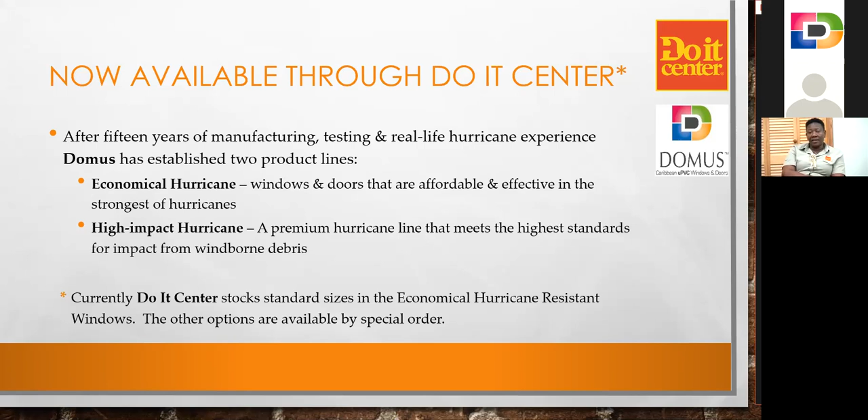Today we will have with us Terrence Ott, who is the CEO of Domus, and Do It Center recently signed on with Domus to present to you the Doors and Windows line. It's the line of hurricane-rated windows, which we already have in stock. And today we'll be sharing with you the features and benefits of having these windows. At Do It Center, we continuously pride ourselves on presenting value added to our customers. And we do believe that introducing this line of windows to our portfolio will add value to our contractors and

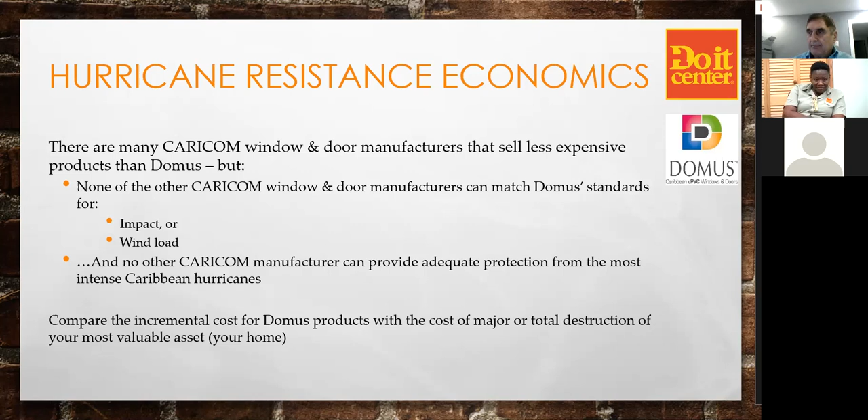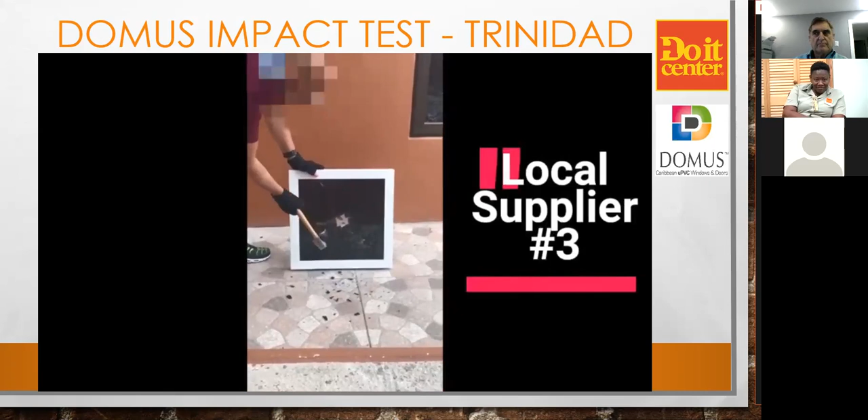Gone right through. Yeah, that makes sense. All right, that's it. No. That is not having glass. Something wrong with it. Okay. This is for you. This is your glass. We're going to test it. How you feeling? You feeling good? We will find out. The thing break right through. God. Look at that. The thing going right through, man. Stop. Laminate glass. We're going to try to hit this and see what happens. But it's going to break. It's gone straight through, look, it's gone through already. 3 hits and it's gone through. This is no good, man. That's gone through. It mash up. That's the end of that, it mash up.

This is your glass. Test your glass. How you feel? It must take 10 shots of this hammer to pass. Nigel, you ready? Let's go. 1, 2, 3. 4, 5, 6, 7, 8, 9, 10. Nigel, you pass.

So I guess that's a demonstration of strength, but we also did a demonstration right in Dominica with even bigger hammers than that one. So this was a video of something we did about a year ago in Dominica in one of the presentations we made there.

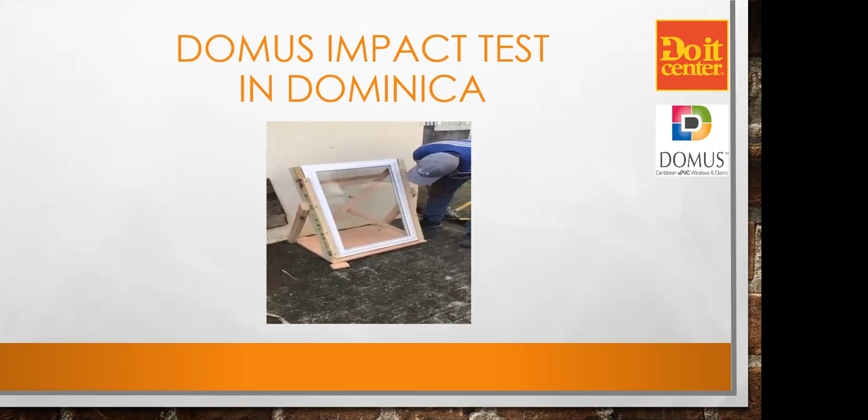Okay, let's go. Hit it now? Yeah. You have to tell me to hit it. Yeah, hit it. What? Can't do any better than that? Yes, I can do better than that. Hit it. Use the same hammer or the other one? Same hammer. Hit it. Okay, hit it again. Okay, whoops. Okay, well, let's try a bigger hammer. Here, is this a bigger one? Okay, so have a go with that one then. Hit it hard. Okay. Okay, now we'll try the big one now.

No, hit it. Okay, hit it. Little one more up here. Maybe one more. Okay, well, I think it should work. Yeah, so that's always fun. And we've tried 10-pound sledgehammers with big beefy guys, and it does the same thing.

So why do you need strong impact glass? Well, there are 2 reasons that windows and doors fail in hurricanes. First of all, you've got airborne debris, stuff flying around. It breaks the glass in 1 or more windows. If you have rubber gaskets, then also they can pop out.

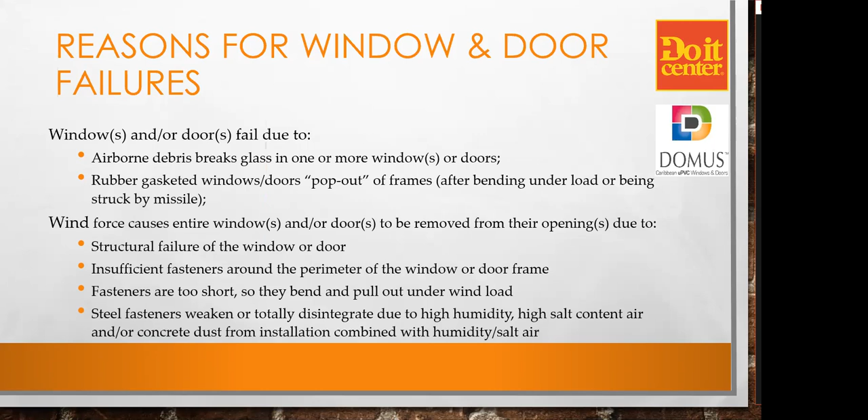Or as in the case of one of the properties, a resort property in Dominica, they used steel fasteners, which were drilled into the concrete openings. Then concrete dust mixed with moisture between the 2 sides of the window totally ate the screws, so that all that was left was the head of the screw. So when a hurricane comes along, it pops out very, very quickly.

So in strong hurricanes, the majority of hurricane shutters fail. Hurricane shutters are typically only rated to 140 miles an hour, whereas with Maria, it was 165 miles an hour. And if you looked at Irma, which could well happen again, the stress on the hurricane shutters is 70% higher than what they're rated to take. Now, we found this not so much in Dominica, but in St. Martin, where people use hurricane shutters all over the place.

We had done a project with our high impact, highly rated hurricane resistant units in a building. And the owner decided he was going to protect the glass. So he put hurricane shutters on about half of the building. He ran out of time and money. And then when Irma hit, he could do nothing. We came back the next day after the hurricane, and sure enough, the windows that had no hurricane shutters were cracked. More than half of them were cracked, but there were no failures.

Then on the windows that had the hurricane shutters, the shutters were gone, and the glass was gone too. The hurricane shutter actually acted as a battering ram and smashed out the glass on every single one of those windows. The hurricane shutters blew away, and the building failed due to hurricane shutters. So the wind load can deflect the shutters sufficiently to pull them out of the rails, but if they don't, they can still act as a battering ram.

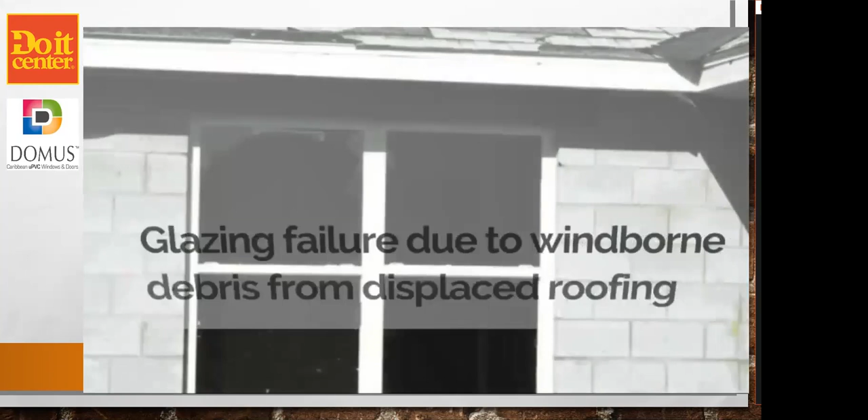So this picture shows a large window that failed. And what happens then is the wind pressure comes in, pressurizes the building, and then lifts the roof off. Now, on a 1,000 square foot roof, if you lose a window or door, you could have up to 30 tons of lift on the roof. And what most people don't realize is that the leading cause of roof failure is that a single window or door has failed.

I've heard the old wives' tale of running around to the other side of the building. If you lose a window on one side, open one up on the other and let the pressure out. Well, that's fine if everything isn't flying around and you can actually get there in time. But typically that wind force can build up in 30 seconds or a little more and take the roof off. So if you lose a window or door, you are going to lose the roof, basically, regardless of how well you fasten it. With that amount of pressure on the roof, it's going to go.

So keep in mind, we need windows and doors that will stand up to those two things. Impact, which could smash out the glass, and we've seen what happens when you've got very weak glass in the previous videos. And the other thing is wind load, which can cause the failure itself.

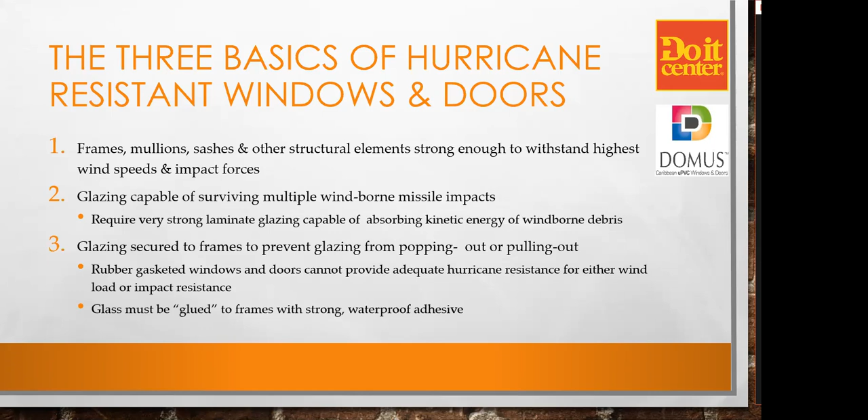So if you have laminate glass and it gets hit, then it no longer has much structural strength. It then relies on its tension, on the elasticity of the laminate. But if the whole glass pops out, then it's not going to do its job. So those are the three basics. And I guess a fourth as well is that it's got to be properly installed, particularly to stand up to wind load.

First of all, you must make sure that you have enough fasteners all around the perimeter of the unit at sufficient intervals to transfer the wind load from the window onto the frame. Now we require no more than 4 inches from each corner and no more than 16 inches between the various screws that are around the perimeter. And those fasteners need to be able to retain the strength for the life of ownership.

I mentioned before the problem of using regular steel screws. Within 2 to 5 years, they can totally be eroded to the point where the window is just sitting in there with whatever caulking strength is left. So we've determined that you require high-grade stainless steel that is going to be impervious to salt air and humidity and so on. And 100 years from now, it will be just as strong as it is today.

The other thing is the fasteners need to be sufficiently long so they don't pull out under wind load or impact. We use 3-inch long screws. And we want to have only a 1/4-inch hole drilled into the masonry. And we want at least 1 inch of those screws in the hole that you've drilled. So when you get pressure on the side, it's going to bridge against the side of the opening. If you use a short screw, they will bend and pull right out.

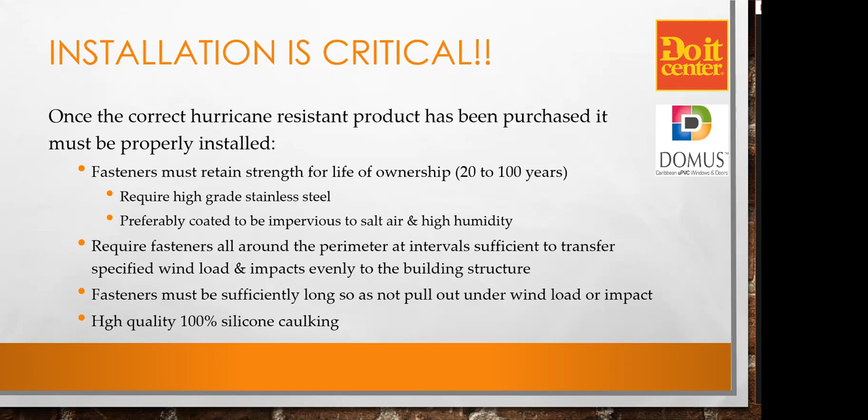So we have the only wind load testing facility in CARICOM. And the reason we can talk about the ability to stand up to wind load is we actually test the units. I have not seen another product manufactured in CARICOM that has been tested. And if I was to take it and put it into our test lab, I have no doubt that 99% of them would fail.

So what we do to test it, we put a test unit against the test wall, and then we apply suction on one side to create a differential pressure. And from there, we can simulate up to 250 mile/hour winds. And keep in mind that the strongest ever hurricanes were Dorian and Allen, and they were 190 miles an hour. So we can simulate even the worst of hurricanes and then go beyond that.

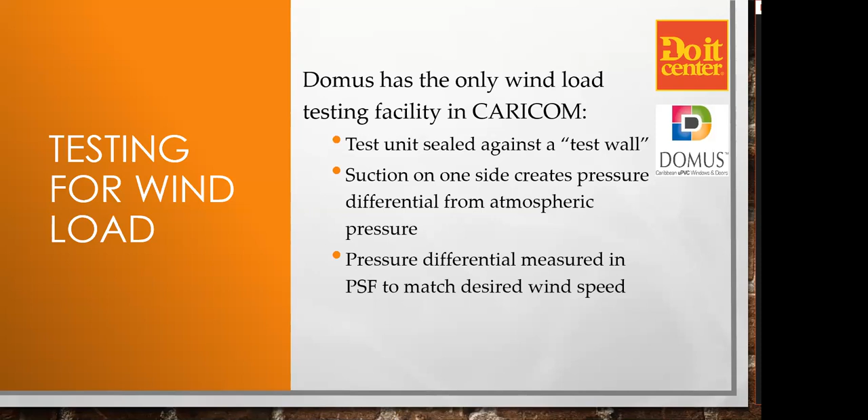Now, in terms of quantifying hurricane resistance, we can look at impact. You remember that windborne debris can knock out the windows as well as wind load. If we're looking at impact standards, we have 2 different products. One is the economical hurricane product, which has to stand up to 3 blows of an ASTM-E 1996 missile C, which is a 4-foot-long 2x4 fired from a cannon at 40 feet per second.

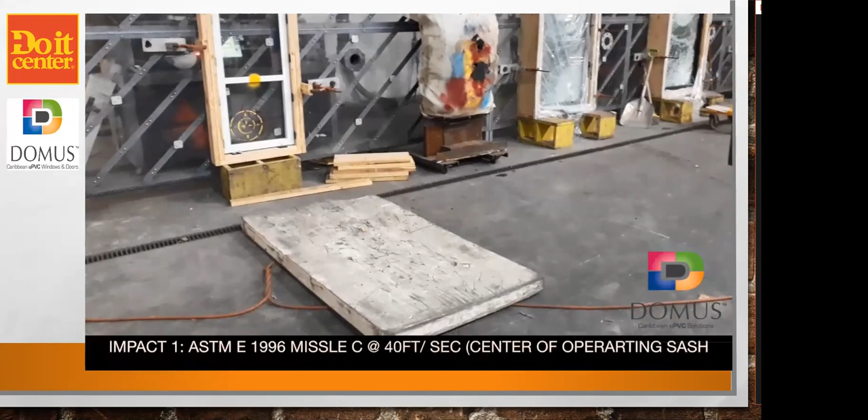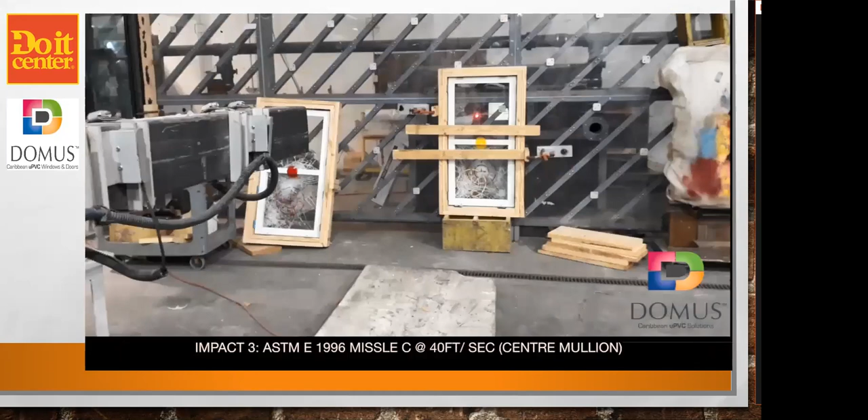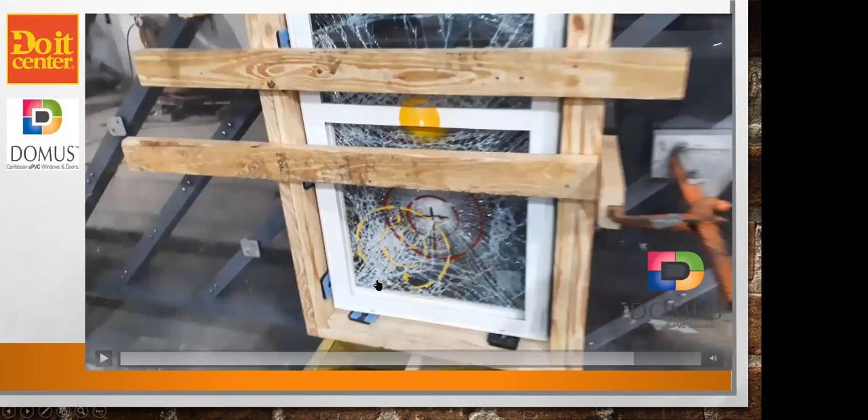Now you can see this window is pretty banged up, but in fact, there is no damage done to the window other than the glass. So if you do happen to take a missile strike in a hurricane, you can simply replace the glass after. But in the meantime, the wind and the debris stays on the outside, rather than letting it in and pressurizing the house and blowing off the roof, as happened to the vast majority of properties that I saw in Dominica after Maria.

Now there's a higher impact standard that we have. This one is the same as Miami-Dade. What we found from Hurricane Irma in St. Martin, which was even stronger than Maria, was that in most cases, we had both the high impact and the economical hurricane products installed. And we found very little difference between the two products in terms of missile capability.

So this one, if you do want the ultimate, which is what you saw with the sledgehammer, has to withstand 3 blows of an ASTM-E 1996 missile D, which is an 8-foot-long 2x4, fired at a higher speed. Now, this is the same as the Miami-Dade standard. And Miami-Dade, I think, set a standard which is very expensive. That laminate is the most expensive part of the window. And so if you have to go to this level, it can increase the cost quite dramatically.

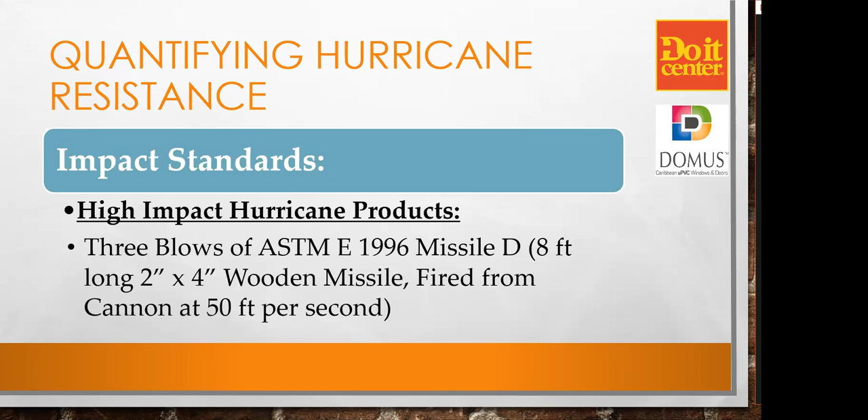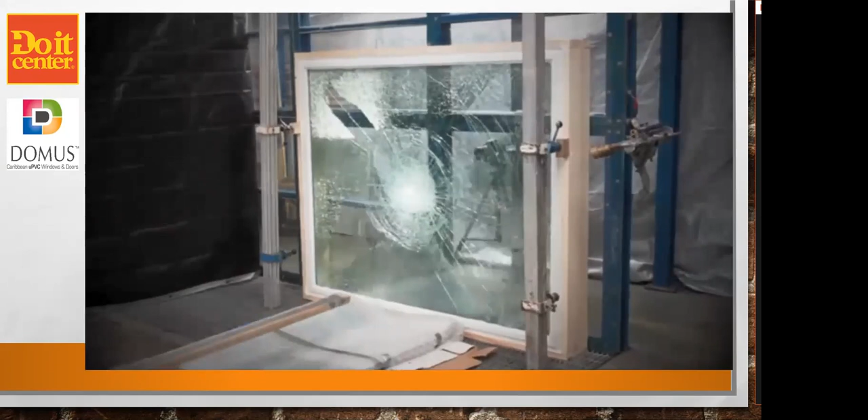Now in this one, you can see how the laminate absorbs the impact. And it is by stretching. The laminate needs to be strong enough to resist the missile going through it. And second, as it stretches, it needs to be capable of absorbing energy. And what's interesting is the bigger the window, the more impact it will take, because the laminate has longer to stretch, which is counterintuitive.

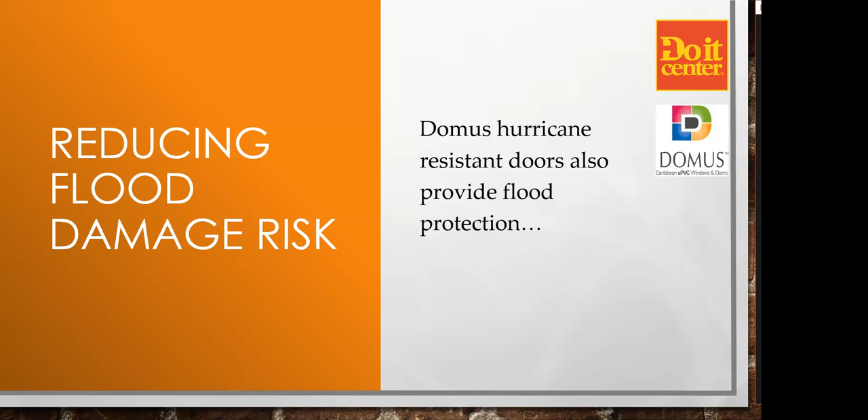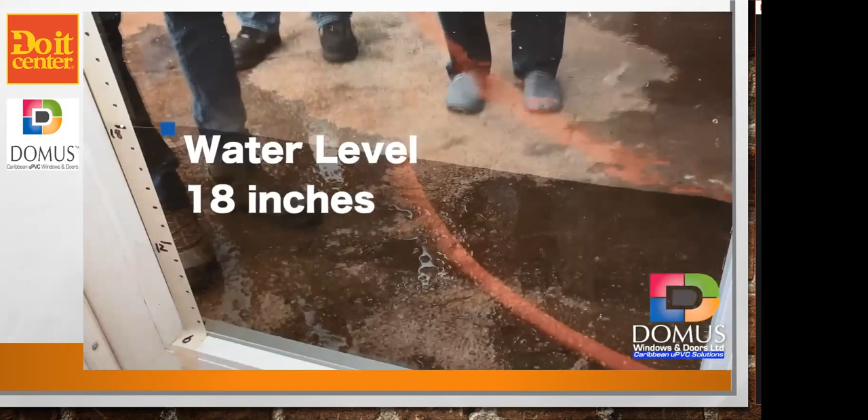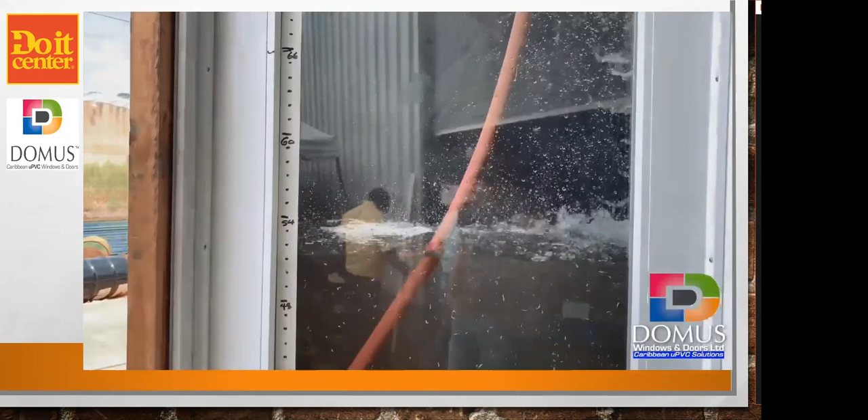Now, I know that in Maria, there was quite a lot of flooding. And as it turns out, our hurricane-resistant doors will also stop flooding. So here's a test that we did recently. I don't know if you could notice that, but that was 54 inches of water, of hydraulic pressure. And you'll also notice how well it seals. That keeps rain out, and it also keeps water and of course hurricanes as well.

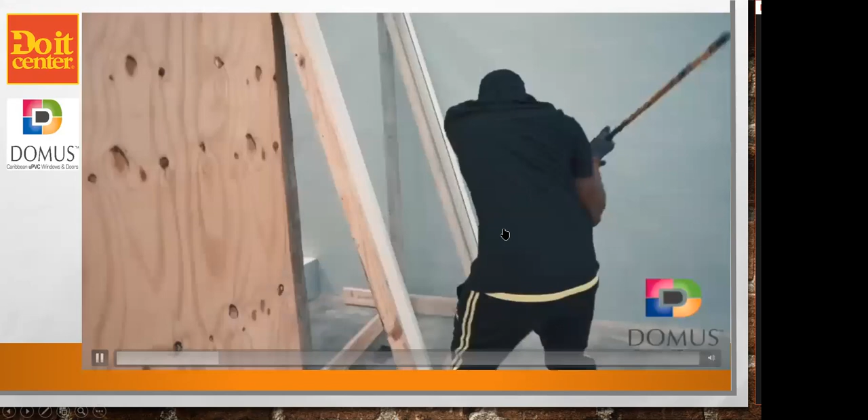So you notice with tempered glass, which is stronger than regular glass until it's hit, one sharp blow and the whole thing explodes and drops away. It's actually the preferred glass for thieves because they can get in in seconds and they won't get cut or anything.

Whoops, I messed up here. Whoops, production problem.

Well, my apologies. I hit that at the wrong time, I guess. So. So sorry about that.

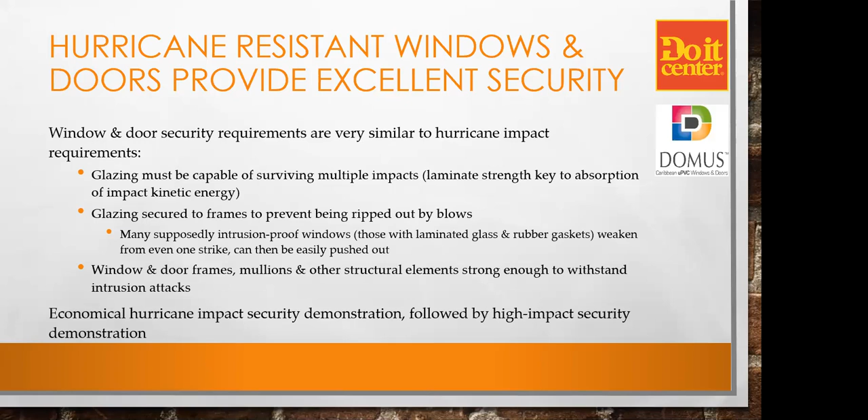What's the problem, ma'am? Oh, there's some guy been...

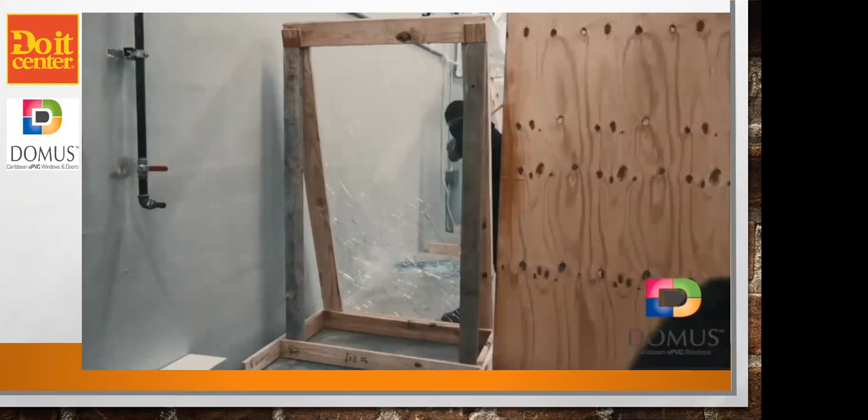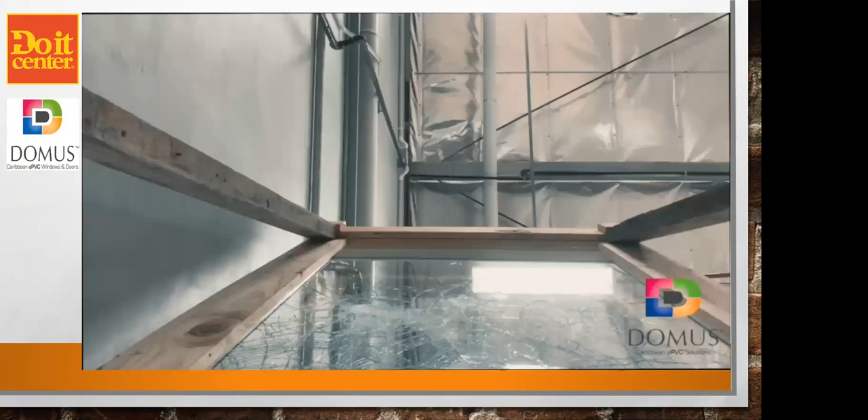So as you can see, as in the case of hurricanes, you're going to end up with cracked glass, but better that than having someone intrude. So I'd like to now turn attention to the product range. I mentioned that we have the economical hurricane resistant products, which deliver excellent hurricane resistance and security. And we also have the high impact that deliver the ultimate.

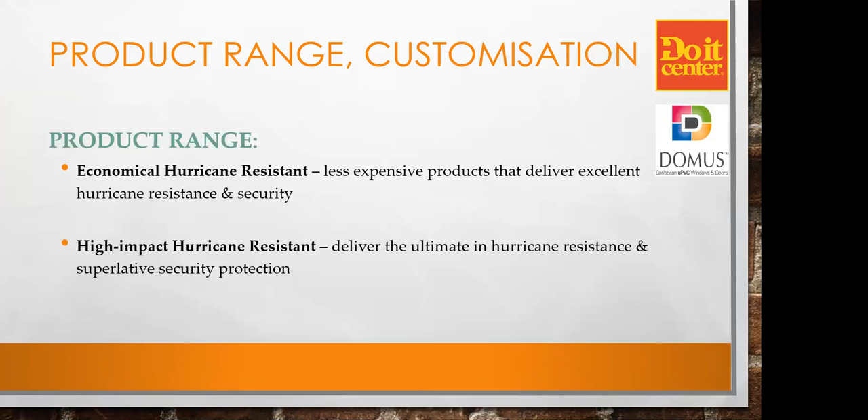Now, in addition to those two ranges of hurricane and security resistance, we also have very highly aesthetic products. First of all, building exteriors are generally sparse, except for windows and doors, but attractive windows and doors can beautify buildings and express your taste.

One thing in Canada, we did some studies with focus groups, and we found that color is a matter of taste, but really when you choose darker colors over a long period of time, it depresses people because that kind of drags everything down. And I think that's one of the reasons that 80 to 90% of all windows in Europe and North America are white. And you'll find some other countries, like Haiti, for instance, you go there, they're all black or red. So it's a matter of taste.

But if you look at most high-end homes in the world, and use Barbados as an example, they use white frames almost regardless of material. If they're wood, they paint them white, and whatever they use, it's white. So we have developed a wide range of modern, attractive products that say class anywhere in the world. We have a full array of windows.

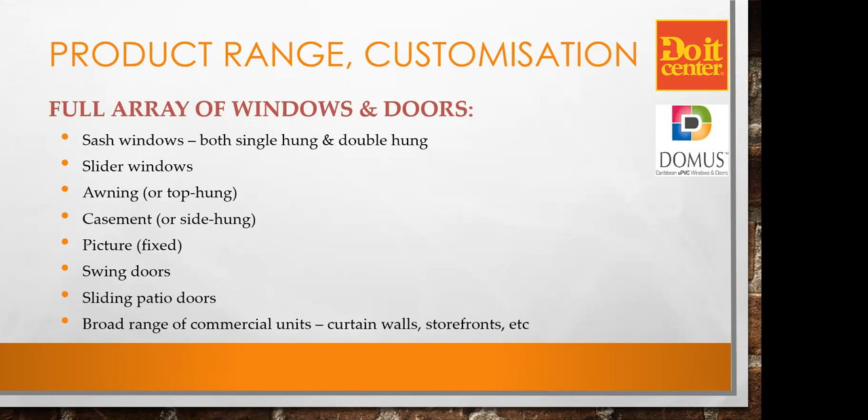Now, here's some examples of some units, and I would like to turn over the floor to Winifred. Winifred, are you there? If you are, enable your mic.

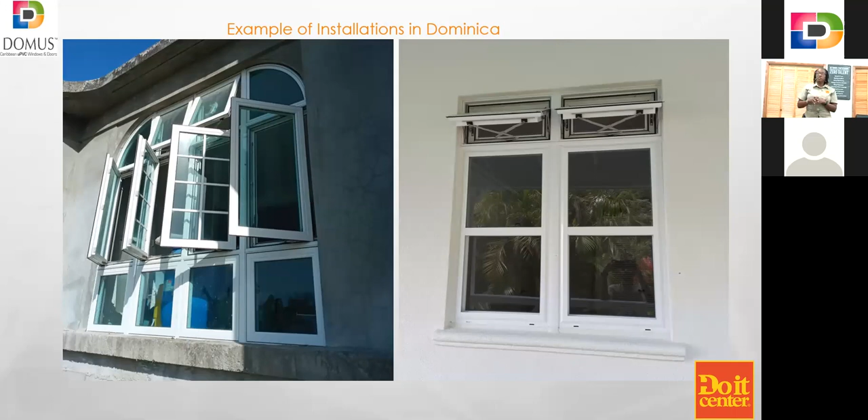And on your left is the customer design. That's the way he wanted his window to look. So the pieces on the left and on the right at the top are fixed pieces. And he has the awning at the top, and in the middle, he has the French style. On the sides, he wanted it plain, and the bottom is fixed as well. And this is another sample of the awning at the top and the sash at the bottom.

So the glazing you can have in various colors: clear, blue-green tint, which is a lovely one if you're anywhere near the water, a gray tint, which is very dignified, a bronze tint, which works very well with the yellows and browns in a house. And then we can also have specialty glass.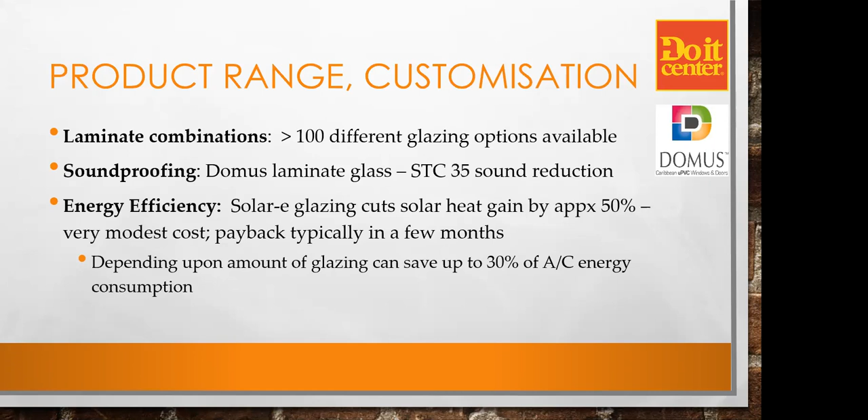The other thing too is that all laminate glass for both of the hurricane-resistant products has an STC 35 sound reduction. So if you happen to be on a noisy street, or in your bedroom you're hearing dogs barking at night and so on, if you've used the laminate glass, it has the additional feature of greatly attenuating the sound. And as I mentioned before, it cuts solar heat gain down dramatically. So here's a demonstration of the soundproofing that you get from any of the hurricane-resistant products.

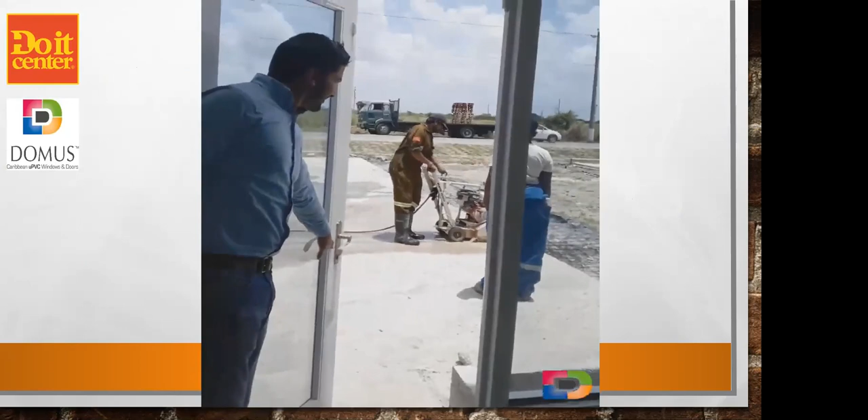So we also do sound studios for TV stations, radio stations, and so on, but that's an extra level. But still, you're going to cut out most of the sound with any of the laminate products.

Now, I mentioned customization. You can either buy the products that are in the store, or with Winifred's help, you can also order custom sizes for all products at no additional cost. So if you're doing a renovation, rather than having to break out the openings, if the sizes are not exactly what you want, then you can order replacements for them right down to within a few millimeters.

And in terms of configurations, you saw that one with the shaped units in the corner and all the different types of window. We have 1,000 configurations of the windows and doors in our database. But if you come up with something else, we also can design other custom things, and again, no additional cost. We also have shaped windows, arches, round, triangular, and so on. And you'll see some of these.

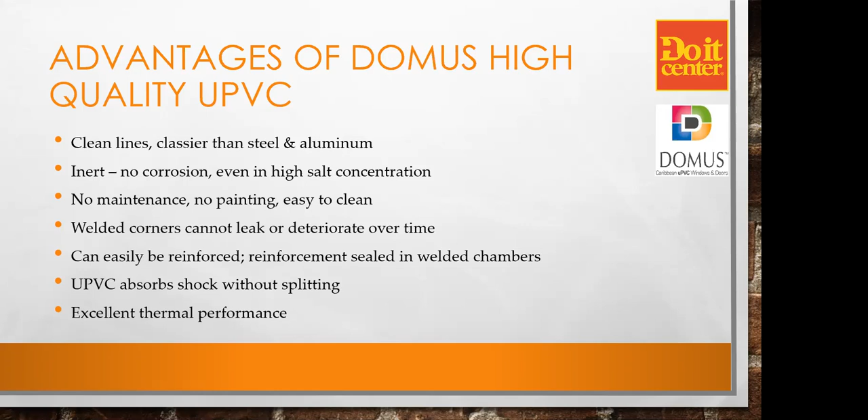Another thing too is that UPVC absorbs shock without splitting or chipping. If you hit an aluminum window and break the finish on it, there's no way to repair it. Whereas with the PVC, it tends to absorb energy in a similar way to what the laminate does. And of course, they have excellent thermal performance. Metals tend to conduct heat very, very easily, and PVC does not.

So in terms of maintenance, a lot of people only look at the front end cost, and they don't think of the implications down the road. They don't think of what would happen if the window broke in a hurricane and destroyed the house. They also don't think about maintenance. Now, there's some people around who really enjoy doing the maintenance. I'm not one of them.

If you use wood, well, it's quite inexpensive, but over time it's going to need painting, it rots and so on. And although it's very nice to have an inexpensive window to start with, when you have to start doing maintenance in a few years, it's not much fun. Steel, I don't know if there's many used in Dominica anymore. We certainly have a lot of them in Trinidad, and they look tacky and dated, and they rust, require constant maintenance, and they conduct heat again.

Aluminum, the exposed surfaces can oxidize, particularly if you're in a high salt content air place, and they have very poor thermal performance. I've mentioned rubber gaskets. Those gaskets crack, they leak, and they provide no security. And if you're using inferior UPVC, then it turns yellow and becomes unsightly, and also chalks and is weakened.

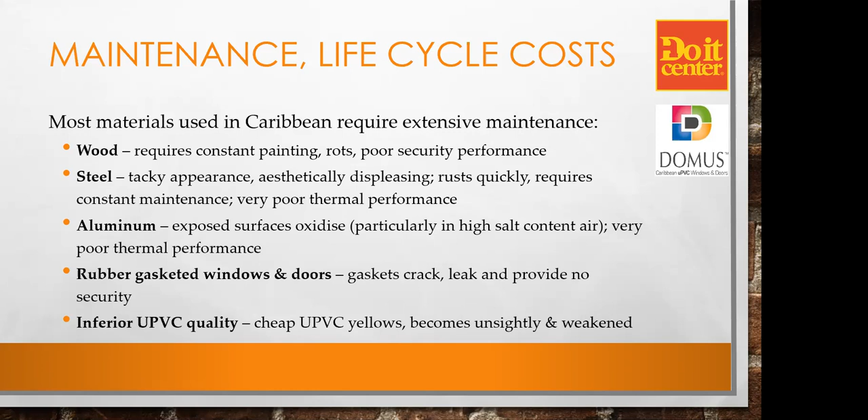I remember when we first started selling into Dominica a number of years ago, people said, oh, well, PVC turns yellow. And we were kind of shocked, because the units we have are the highest quality PVC made in the world, from a German company and a Canadian one. And they are guaranteed for 20 years not to turn yellow or darken or anything. But again, you sometimes get what you pay for.

So I mentioned we have a 20-year guarantee that they won't yellow, they won't weaken, rot, chip, peel, blister, darken, or otherwise deteriorate for 20 years. So if at the end of 20 years they're still looking good, you're in pretty good shape. Probably they'll be good for another 20 years or 60 years.

All of our hardware is guaranteed for 5 years. Now that's subject to cleaning. Obviously, if you're on the coast and you've got salt built up and you do nothing to get the salt off on occasion, then you're going to have problems with it. And the other thing too that sometimes happens on a casement and awning window, people leave it locked and then try to open it. And the locks are very, very strong for hurricane resistance, and you can break the hardware if you work at it. And our laminate glass is also warranted for a 5-year period.

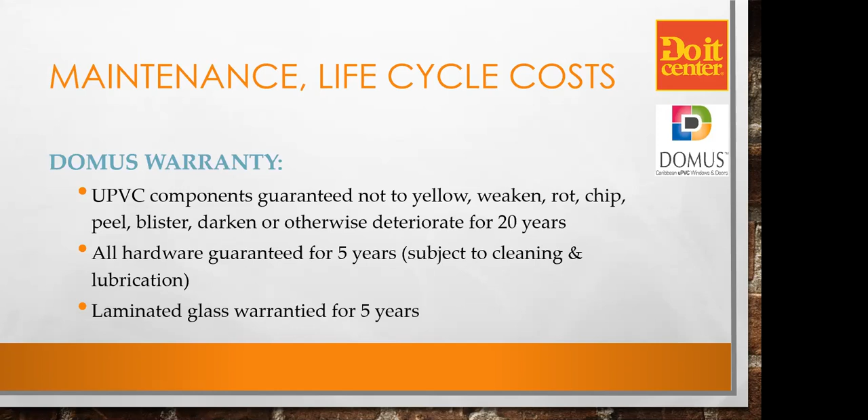Now, choosing windows and doors may not be quite as simple as one might think. First of all, if you've got a lot of choice, then that's good and it's bad. It's bad because you want to make sure you make the right choices. So that's where it's important for someone to be able to provide advice. Winifred, for instance, has been doing this for a long time. She knows what the different windows will do, the positives and negatives of each one.

For instance, awning windows will keep the rain out, but they don't allow as much air movement as a casement window, et cetera, et cetera. And some windows are going to be more expensive than the others. So that's very, very important to get the right recommendation.

Also, installation, I mentioned, is very, very important. Now, if we have contractors who want to use our products, then we will provide training for any of the contractors. Or we do have a contractor in Dominica who is capable of installing to our standards, been trained and has the knowledge and so on. So either way, we want to make sure that they're properly installed, so that it doesn't affect the operation and maybe break the hardware over time or something. And the other thing too is that with a hurricane resistant product you want to make sure that it's properly installed and not going to fail.